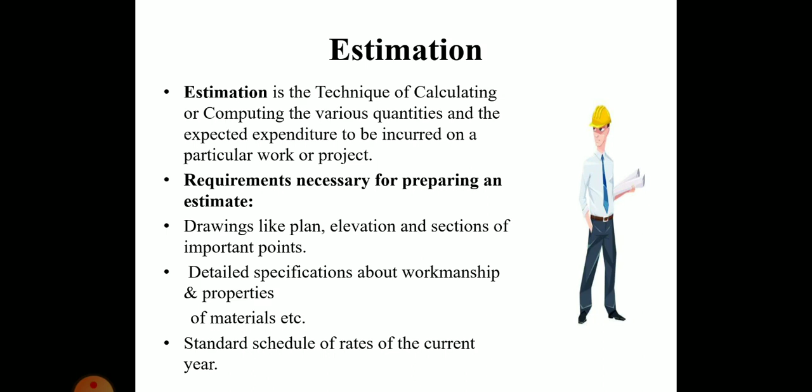So the needs for estimation and costing: first, estimation gives an idea of the cost of the work, and hence its feasibility can be determined—whether the project could be taken up with the funds available or not. That means it gives the total cost idea of the work.

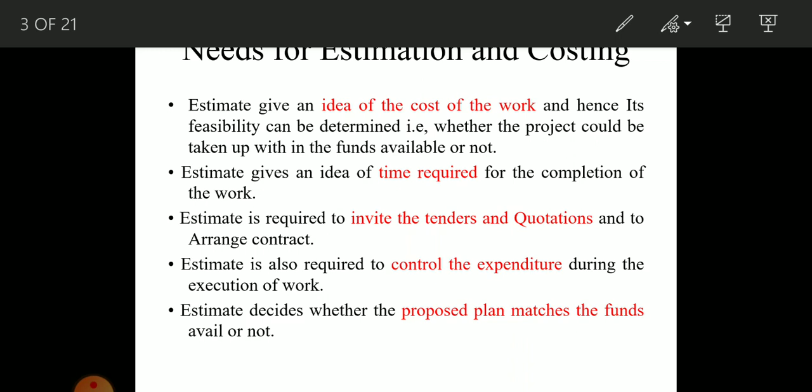Also, it is required to invite the tenders and quotations and to arrange contracts. It also required to control the expenditure during the execution of the work, and it decides whether the proposed plan matches the funds available or not.

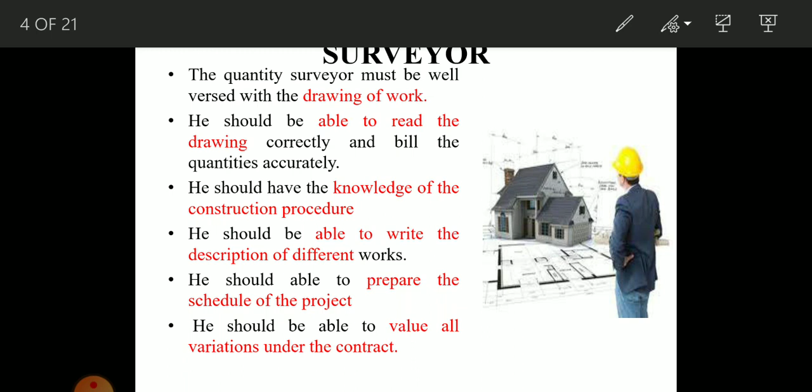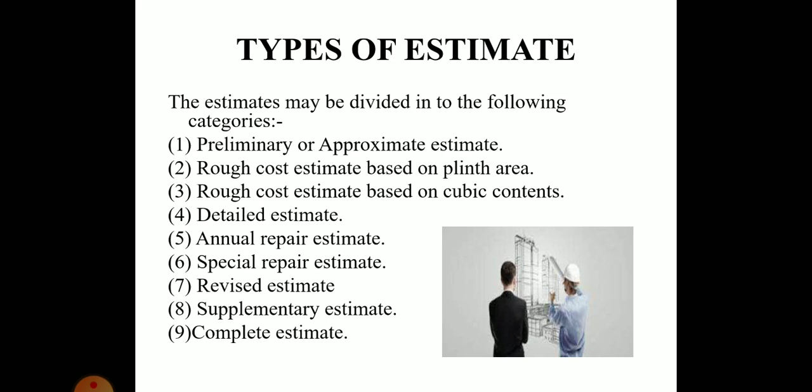Estimation is divided into 9 parts. The first is preliminary or approximate estimate.

What is preliminary and approximate estimate? The object of this type of estimate is only to know the approximate amount of expenditure which is needed to obtain the administrative approval by the competent authority.

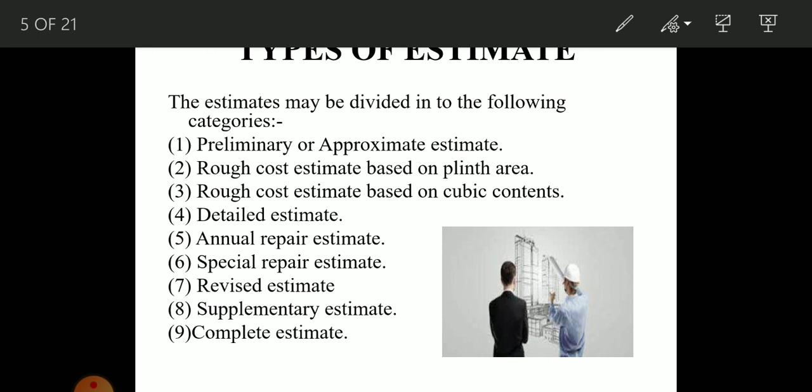Then the revised estimate - that type of estimate is prepared whenever there is an increase in the sanctioned amount of expenditure by more than 5%, for which revised administrative sanction is required. Then the next is the supplementary estimate, complete estimate, and revised estimate.

Now we just saw what a preliminary or approximate estimate is. The estimate is prepared to decide financial aspects, policy, and to give the idea of the cost of the proposal to the sanctioning authority. It should clearly show the necessity of the proposal and how the cost has been arrived at. The estimate which is prepared using any rough method to get the approximate cost of construction anticipated for a project is called the approximate estimate.

In a preliminary or approximate estimate, the following documents should be attached: a detailed report, site plan of the proposal, and it should also clearly mention the acquisition of the land, provision of electricity and water supply.

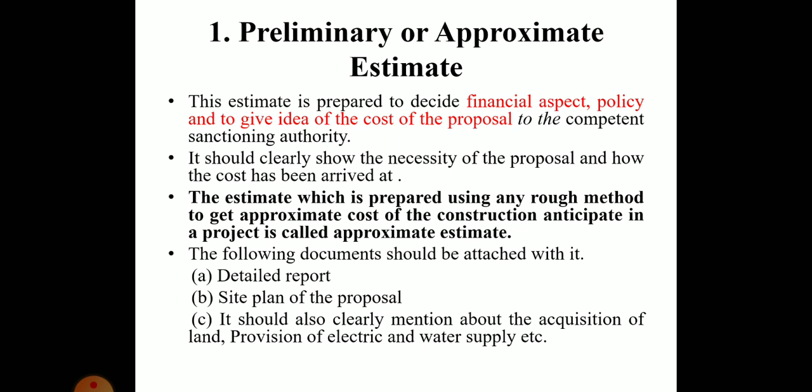Plinth area estimate, which is based on the rough cost, uses the plinth area of the building, meaning length into breadth - that is the roof portion only, excluding the plinth offsets. The estimates are prepared on the basis of the plinth area of the various buildings proposed to be constructed. The rates are arrived at by dividing the total cost of construction by its plinth area.

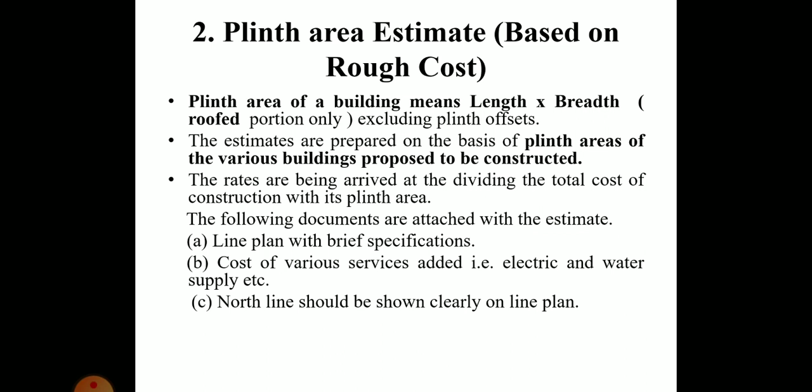The following documents are attached with the estimation: a line plan with a brief specification, cost of various services added - that is electric and water supply - and the north line should be clearly shown on the line plan. Next is...

Detailed estimate. After getting the administrative approval on the rough cost estimate, the detailed estimate is prepared. The estimate which provides the item-wise quantity of work, having the unit rate and item-wise expenditure in the project, is called a detailed estimate.

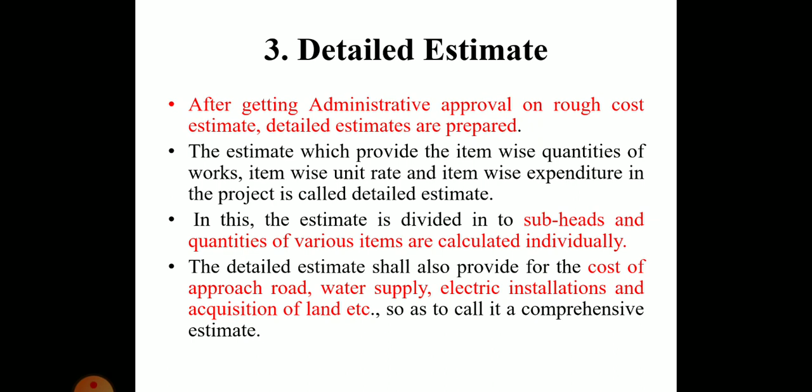In this, the estimate is divided into subheads and the quantities of the various items are calculated individually. Detailed estimate shall also be provided for the cost of the approach road, water supply, electric installations and acquisition of the land. So it is called a comprehensive estimate.

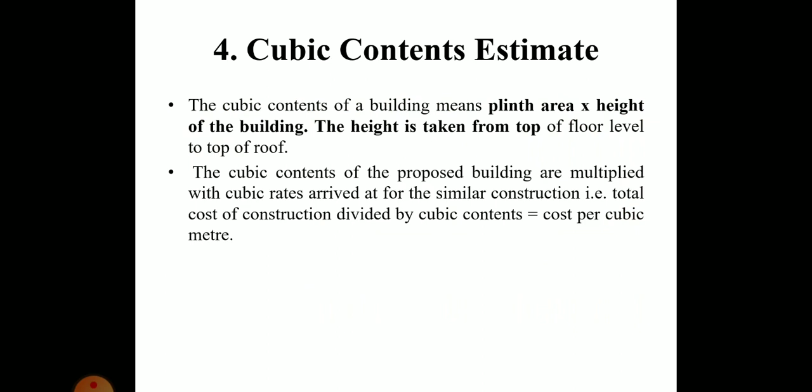And next is the cubic contents estimate. The cubic contents of a building means the plinth area into height of the building. The height is taken from the top of the floor level up to the top of the roof. The cubic contents of the proposed building are multiplied with cubic rates, arrived at for similar construction. That is, the total cost of construction divided by the cubic content equals the cost per cubic meter.

The next is the annual maintenance estimate. This is prepared by the concerned department for getting the allocation of funds, which is made in the annual budgets. In order to keep the building and roads in proper condition, annual repair should be carried out as follows: first, in case of a building, whitewashing, oiling and painting of doors and windows, then cement plasters - repairing insides and outsides - and repair of floors, etc. In no case should this annual repair amount increase more than 1.5% to 2% of the capital cost of the building.

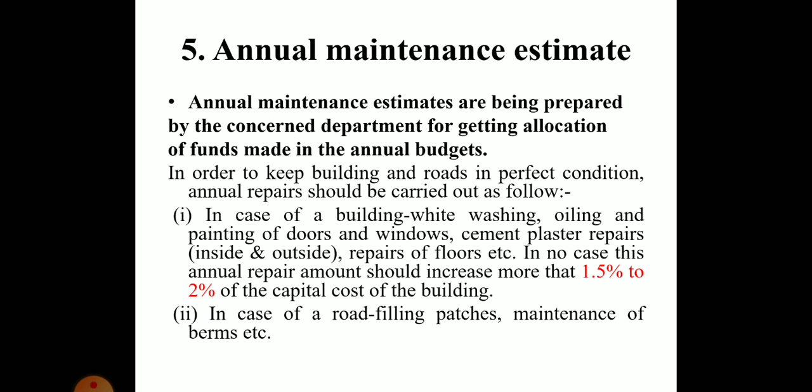Also, the second part is it should also carry out road filling patches and maintenance of berms. The next part of the estimate is the special repair estimate.

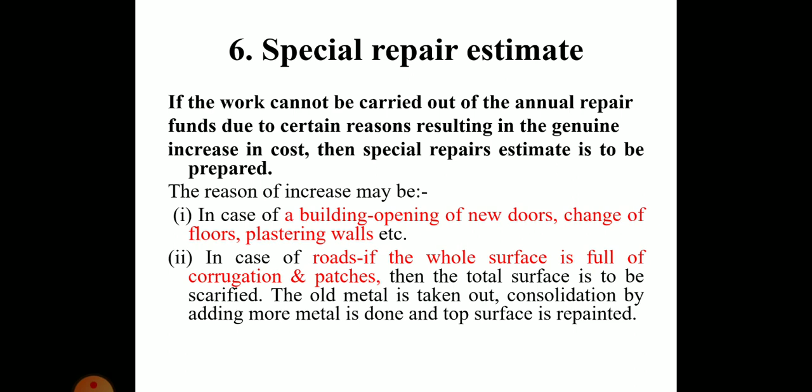Next is the revised estimate. It is when a sanctioned estimate exceeds by 5%, either due to the rate being found insufficient or due to some other reason. A fresh estimate is prepared, which is called a revised estimate. A comparative statement is attached on the last page of the estimate, giving the reasons for the increase in cost.

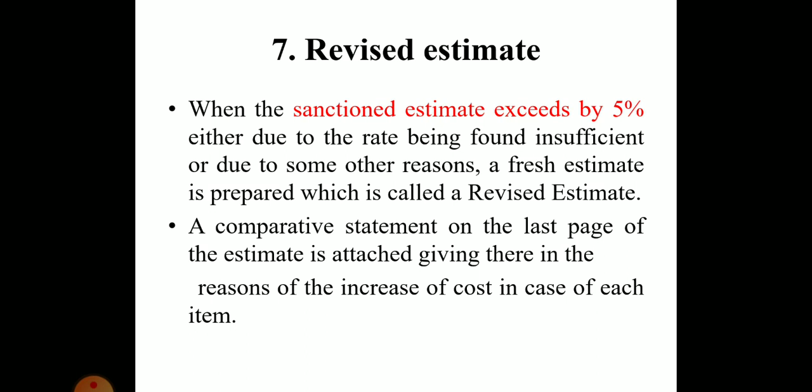Next is the supplementary estimate. It is prepared whenever, during the progress of the project, any change is ordered in the original proposal for the betterment and development of the project. For such changes, an estimate for the additional items of work is prepared and the amount is worked out, for which sanction is obtained or required.

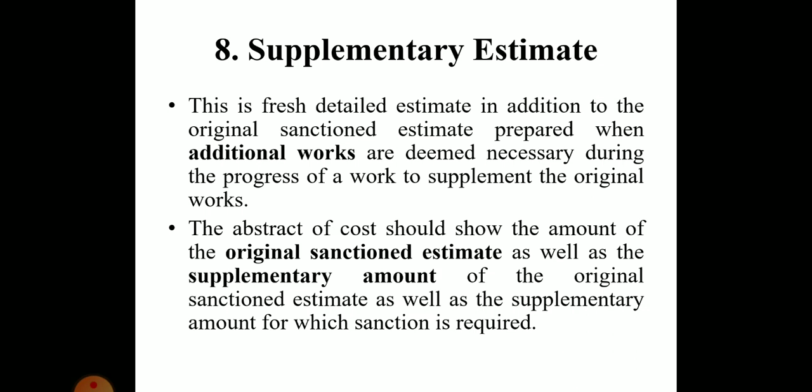And the last one is the complete estimate. In a complete estimate, in addition to the cost of construction, it includes the cost of the land, expenses towards surveying, preparation of plans and estimation, legal assistance, registration of documents, payment of taxes and service charges. This is called the complete estimate.

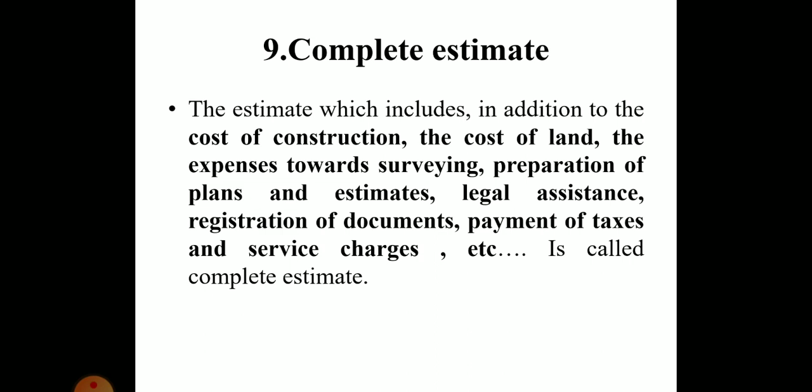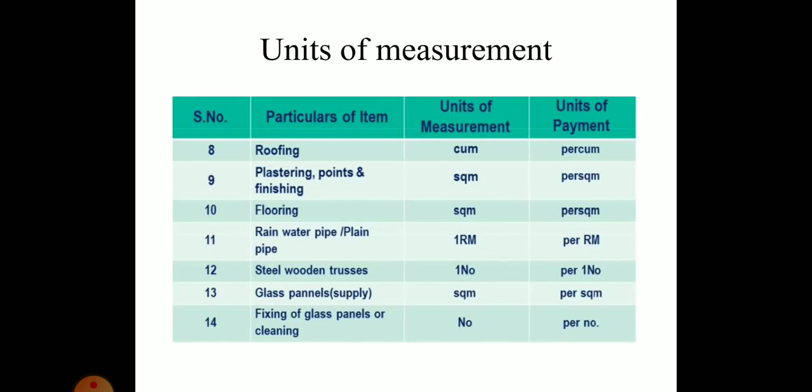So the next part is: what are the components of the estimate?

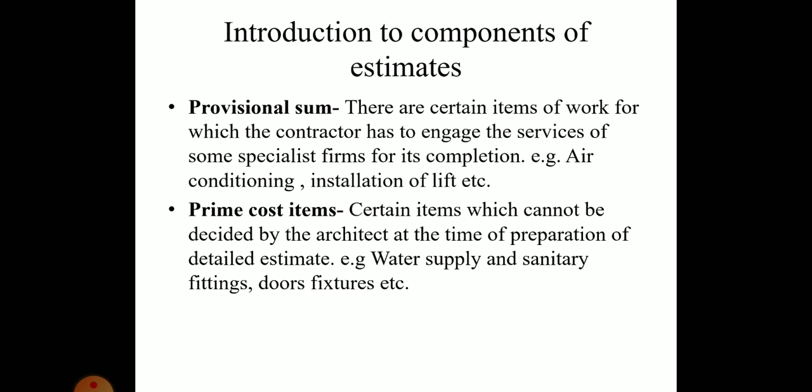Next is contingency charges. Contingency charges means it is given as 5% of the estimated cost in detailed estimation. So it covers expenses of a miscellaneous character that cannot be appropriately classified under any specific subhead.

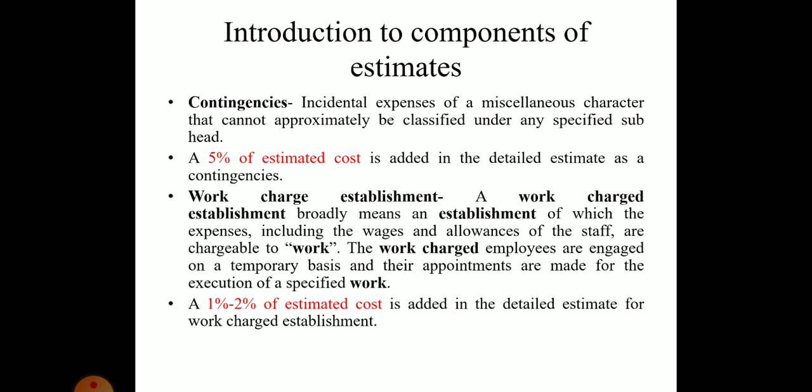Work charge establishment: a work charge establishment is broadly an establishment whose expenses, including wages and allowance of staff, are chargeable to the work. The work charge employees are engaged on a temporary basis and their appointments are made for the execution of a specific work. So 1 to 2% of estimated cost is added in the detailed estimation for a work charge establishment.

So the introduction of components of the estimation includes centage charges. The engineering department of one organization has to carry out certain work belonging to other departments, so an additional amount of 10 to 15% of estimated cost is included in the estimate.

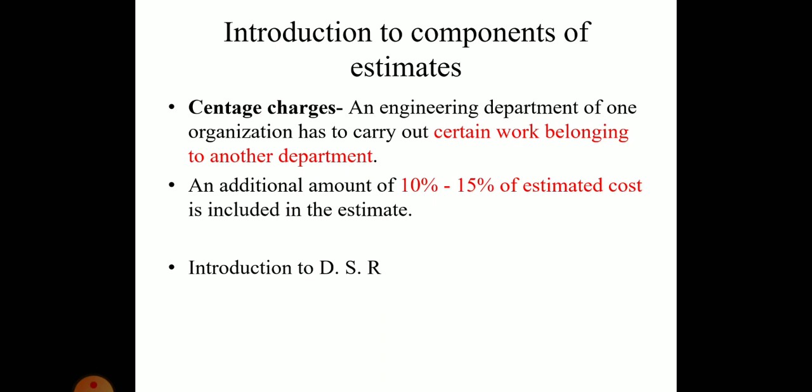Next part we will see is what is DSR. Okay, so thank you so much.